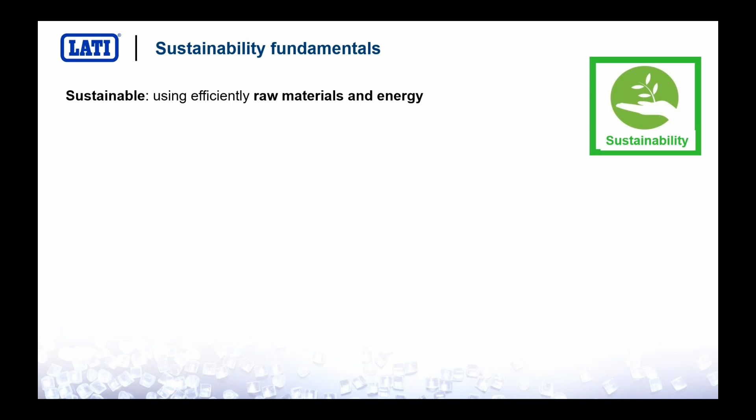So first of all, let's introduce some of the most important concepts of sustainability. First of all, we have to redefine what is sustainable. We know that is sustainable every process, material, or application that uses in an efficient way raw materials and energy. We have to keep this in our mind. So use efficiently raw materials and energy.

The second concept is the so-called life cycle assessment. What is the life cycle assessment? It's a quite complicated process allowing us to evaluate the impact on the environment of a process, an application, a product, or a service. This is a quite complicated evaluation.

The third concept is the so-called global warming potential. The global warming potential is expressed as kilogram of CO2 equivalent and is calculated and defined for every product, process, or service. All these topics are quite familiar here at LATI. We strongly believe in the track of sustainability, and that's the reason why we have just achieved the very important goal of the platinum medal EcoVadis for the highest ranking of sustainability.

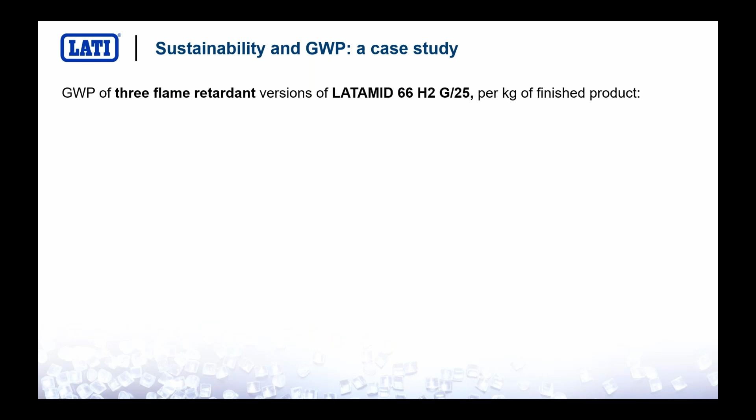Now let's give a look at LATI materials and global warming potential. Let's try to understand what is the impact on the planet, on our environment of three typical flame retardant compounds. We have taken three very popular grades made out of polyamide 6,6, 25% glass fiber, and flame retardant using brominated polystyrene, the so-called V0CT1, aluminium diphosphinate, the so-called V0HF1, and red phosphorus master batch, the so-called KBx.

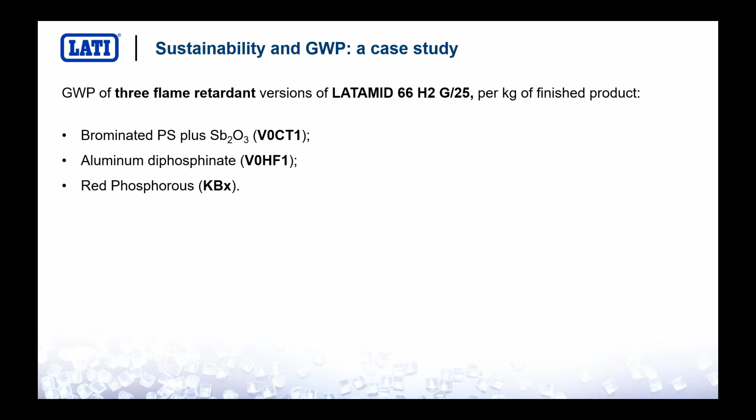The global warming potential for those plastics per kilogram of finished product is a number between 6 and 7 kilograms of CO2 equivalent per kilogram. Please note that these numbers are not obtained by using a very simple, straightforward online tool. We have a dedicated software, a dedicated database, and our calculations are extremely accurate. So these numbers are to be considered as extremely reliable.

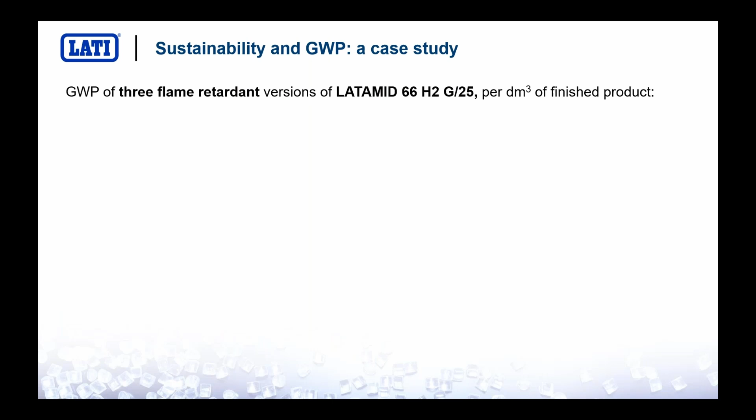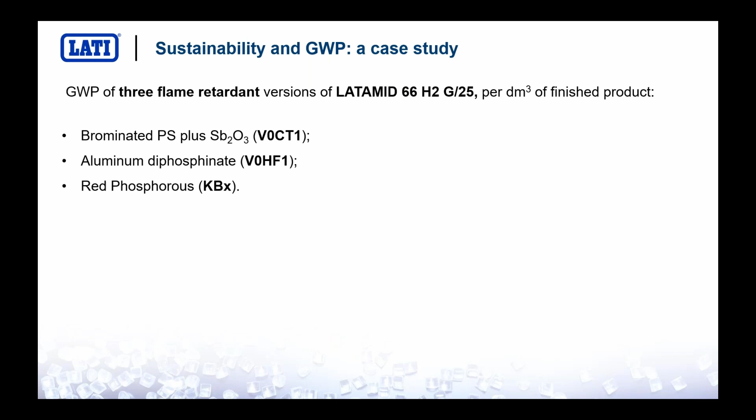If we move from this evaluation per kilogram of finished product to the evaluation per cubic decimeter or liter, so the volume of the application, then we will see that these numbers are skyrocketing because of the density of the material. So per every liter of the aforementioned flame retardant materials, the global warming potential is increased to 9 to 10 kilogram of CO2 equivalent per liter. So you see how impacting is every kilogram of flame retardant plastic that you put in your project.

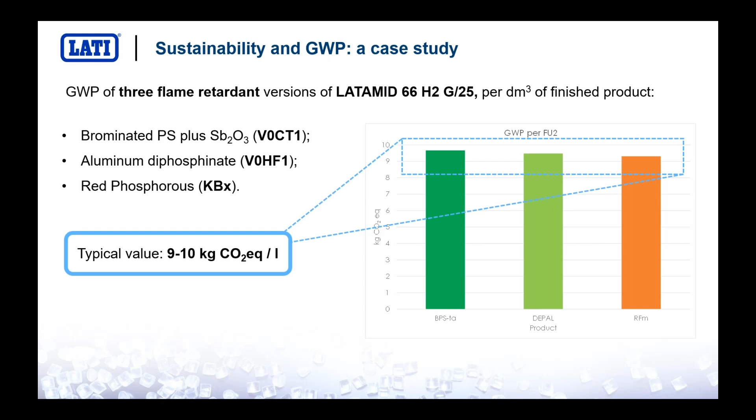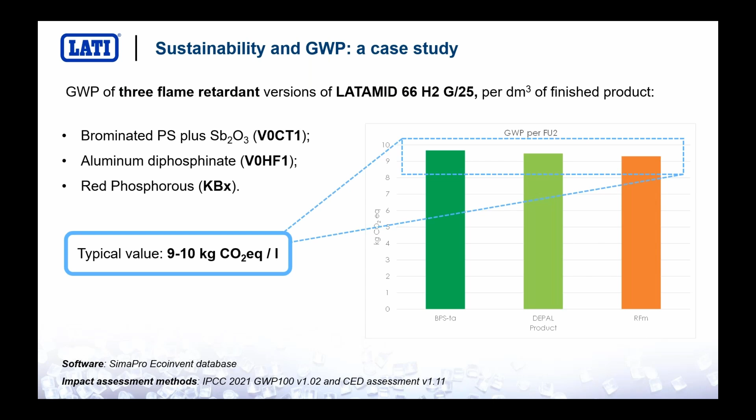Now, let's try to understand where does this global warming potential come from. Let's try to understand how to split the whole process of creating 1 kilogram of flame retardant plastic and try to understand where does this global warming potential come from. We have done this exercise with the university, and we have tried to keep track of everything happening from cradle, so from the very beginning, from the creation of raw materials, to gate, to our logistics gate. So we have studied the whole process from the raw materials to the finished product, to the finished LATI pellets.

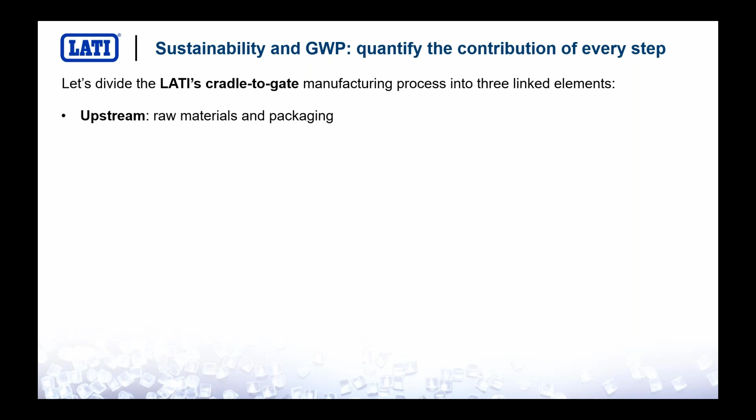We have divided the whole process into 3 streams: the upstream, including global warming potential related to raw materials and packaging of raw materials; the core process, that is our extrusion process; and then the downstream, which is the logistics, bringing our materials to the gate.

What we have found is that for a material like this one, a nylon 6 with 20% glass, halogen-free flame retardant, having a global warming potential of 7.9 kilogram of CO2 equivalent per liter, it is possible to evaluate the impact of every kg of this material on human health using a very specific system called Eco Point, whose definition is the environmental impact of every European citizen.

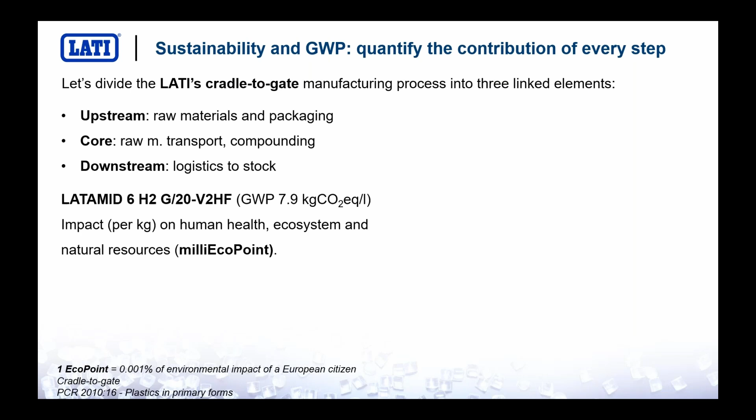It is possible to evaluate how every stream impacts on this global warming potential, and what is found is that the biggest portion of this impact is due to the upstream. So the biggest portion of the global warming potential of 1 kg of this material is related to the production of raw materials. The biggest issue is coming from the production of raw materials, not extrusion or transport. It is the production of plastic in itself that is harming the environment.

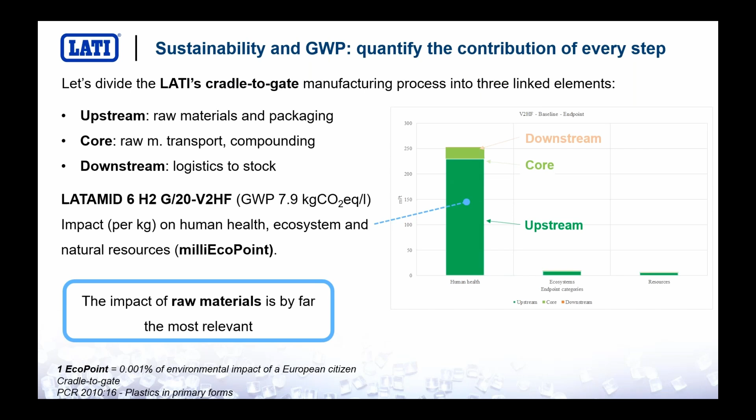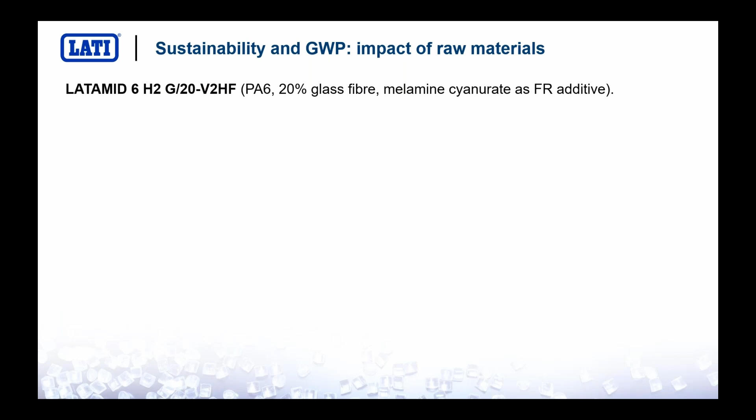Let's try to understand which raw material is actually impacting the most. We have done this exercise on this very material, and what we found is that the main components of the compound do not impact the same way. The biggest impact is due to the production of nylon 6. It's not the glass fibers, it's not the flame retardant system. The global warming potential is coming from the production of the plastic material. The nylon 6 in itself impacts for close to 85% of the total global warming potential.

This is a very important piece of information, because everybody may think that it's up to how you produce it, what kind of electric power you use. No way. It's the production of the plastic in itself that is actually creating the biggest chunk of the whole global warming potential.

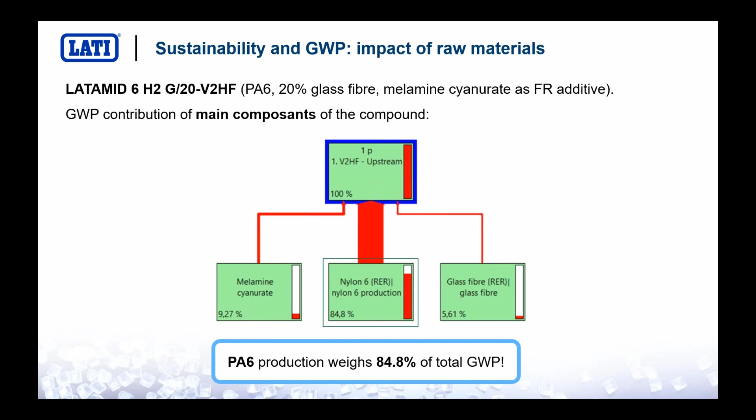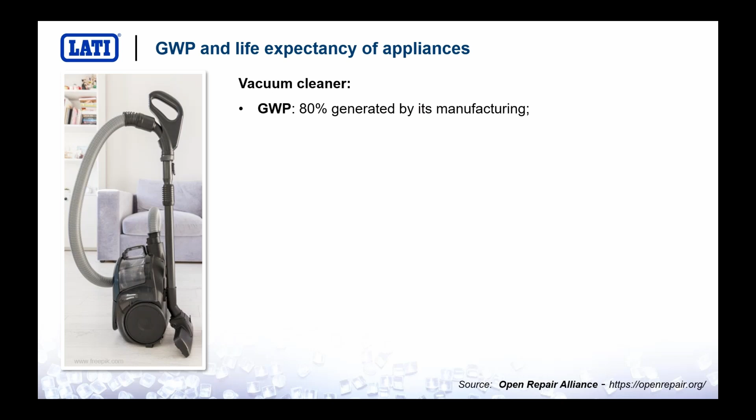So now let's introduce our partner here, the vacuum cleaner, and let's try to understand how global warming potential relates to an appliance like a vacuum cleaner. For a vacuum cleaner, what we know, and the source is Open Repair Alliance, is that 80% of the global warming potential generated by a vacuum cleaner during its whole life is happening during the production of the vacuum cleaner itself. By its manufacturing, assembling the parts, molding the plastics, creating the plastics, that part of the process is creating 80% of the whole global warming potential.

The second piece of information, which is very important, is the life expectancy of a vacuum cleaner. Vacuum cleaners are expected to last more or less 8 years. Some of them may last a little bit more, but that is the average life expectancy of a vacuum cleaner.

What happens when vacuum cleaners stop working? What is the most popular failure cause? The first failure cause is a broken electrical cord, 24%. Then we have failure in the electrical motor, 14.5%, failure in other electrical parts, 13%, and failure of the switch, 8%. All of you know what happens when the vacuum cleaner stops working.

We just dispose of it. Most of us do not even attempt to repair it. But if we wanted to try to repair it, we would find that 57% of the vacuum cleaners that have been submitted for repairing attempts have been actually repaired, and 18% more should be repairable if necessary information or tools were available. This means that 75% of the broken vacuum cleaners may be repaired.

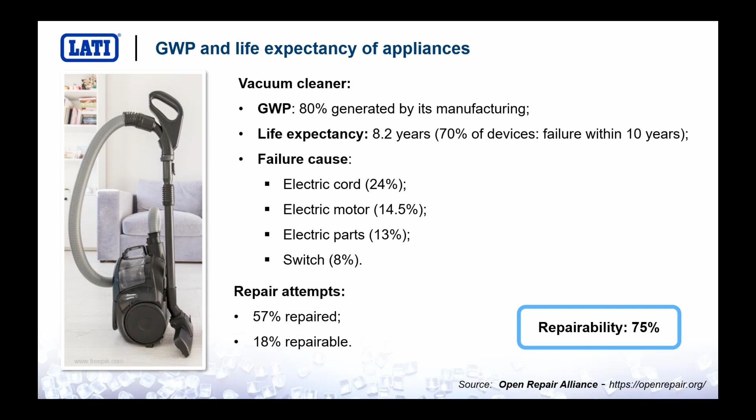What are the most popular issues that are a hindrance to repairability? The most common issue is not having the spare parts, 24.7%. The second one is related to the assembly, to the design of the device itself. It is impossible to open it, impossible to disassemble it. Some of the parts are not accessible, and this means it is not convenient to fix it. And then we have excessive wear of the material itself, wear or failure related to material degradation. These are the 3 most common, the most popular repairability issues, which are leading to the disposal of the vacuum cleaner.

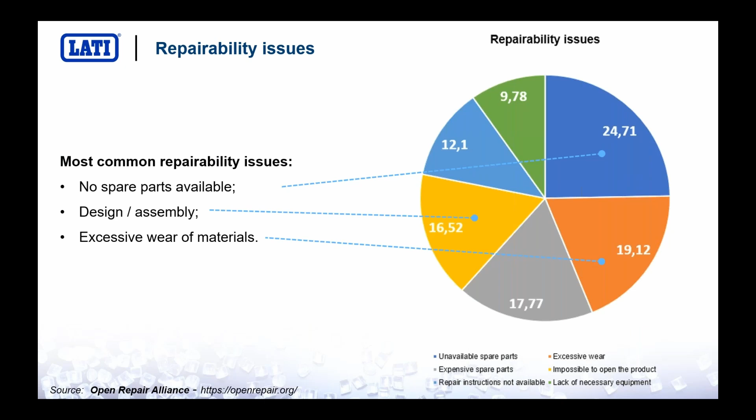Of course, the European Union has taken these kinds of issues into very careful evaluation, and we have new initiatives which have been created in the Green Deal. The most important one is the Ecodesign for Sustainable Products Regulation, ESPR.

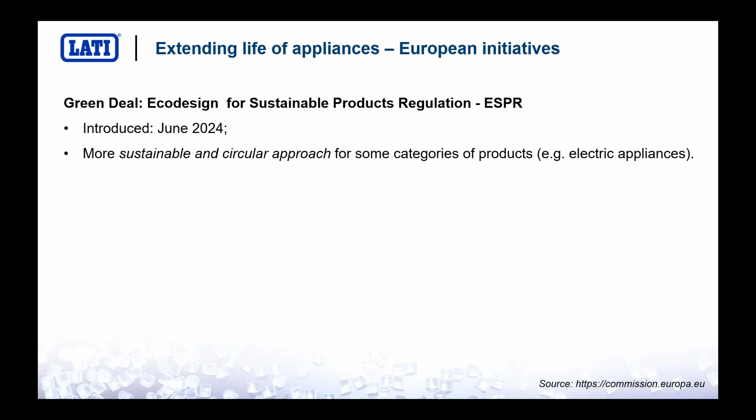What is this ESPR? It's a very large regulatory layout introduced in June 2024, whose aim is to create a new, more sustainable and circular approach for some categories of products, mostly electric appliances, but not only—there is also a part related to textiles and so on. Of course, I'm not saying this will be the law from tomorrow, but what we have to keep clear in mind is that we have to go in the direction of creating new products in a more sustainable way and in a circular economy.

One of the tools introduced in the ESPR is the so-called digital product passport. What is a digital product passport? It's a bunch of information, a bunch of data, which will be accessible by QR code when you go to the media store and want to buy a new vacuum cleaner. You will find a QR code, you scan it, and in a screenshot you will have plenty of information.

First of all, you will have data concerning the sustainability and circularity of that very product. This information will include how many recycled raw materials have been used to manufacture that piece of equipment, and information about durability and any possibility to have it repaired in conformity with the right to repair regulation.

And then you will also know if that application has been designed to be recycled. Design for recycling means that at the end of life, that piece of equipment will be easily disassembled and scraps divided into homogeneous waste to be recycled or sent to energy recovery.

Of course, this digital product passport will give us plenty of information about the sustainability and circularity of this equipment, but it will also provide the so-called sustainability score, which will be a scoring method having some impact on the price of the sold good.

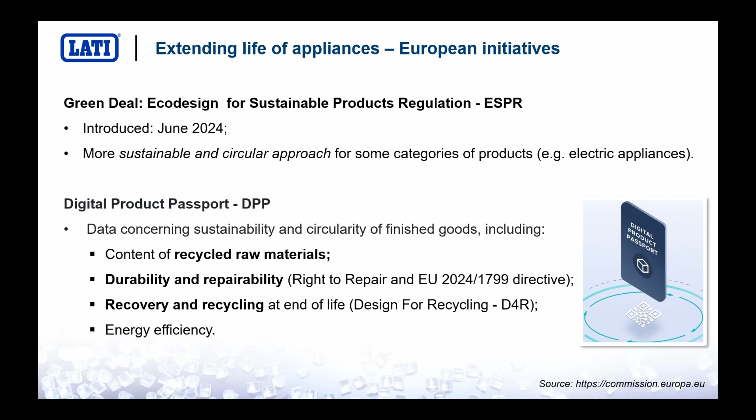Last but not least, of course, you will have indications about how efficiently this piece of equipment uses electric energy. So how will the appliance of the future be? How can we think about how to design an appliance for the future? Which kind of materials should we choose?

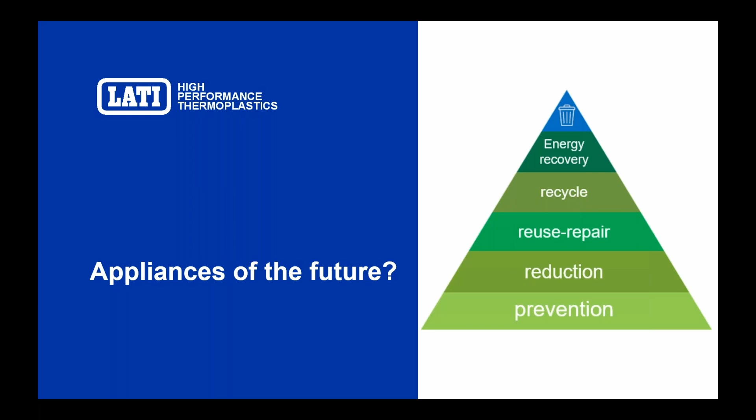So for the vacuum cleaner of the future, which are the most important steps we have to take into consideration? First of all, if we have to design a vacuum cleaner, we will need plenty of details, plenty of data. We need information about materials, global warming potential, life cycle assessment, and so on.

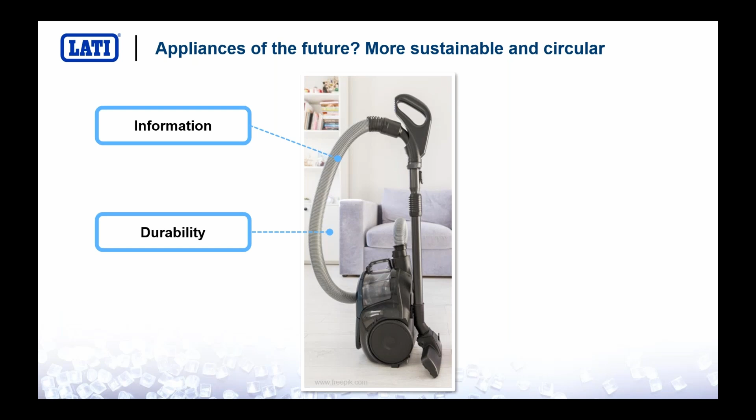We are already receiving plenty of requests from our customers concerning these very hot topics. Then we will have to provide indication about durability, which is also a very important step in the direction of extending the lifetime of the vacuum cleaner. We will have to use recycled raw materials and indicate what kind of raw materials have been used in our application.

We will have to design the application to be energy efficient. It will have to be as repairable as possible, because repairing means extending the life, and extending the life means reducing the global warming potential and the impact on the environment.

And then it will have to be designed for recycling. So at the end of its life, it must be possible to easily disassemble it, to divide scraps and materials in a very efficient way in order to recover and recycle them very easily.

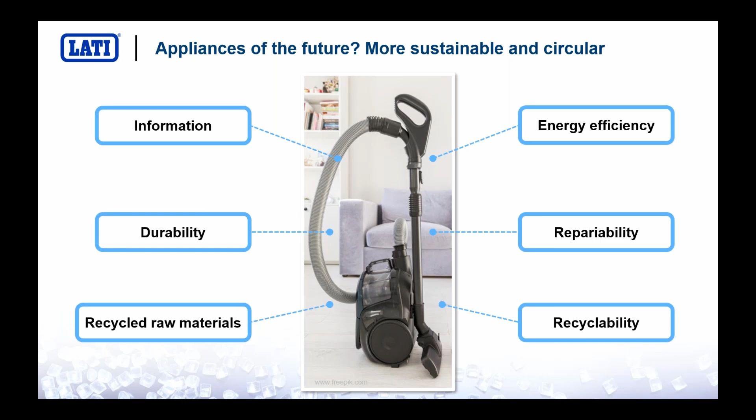Let's take a closer look at each one of these six steps, one by one.

Information. Information is very important. What kind of information are we asked for? Global warming potential and life cycle assessment. All this information must be available for LATI's customers. So if you are working in the appliance industry or automotive industry or whatever, and you ask LATI for indications about the global warming potential and life cycle assessment, at least global warming potential is something that we can already share with you very easily. We have created a dedicated team, fully dedicated to the sustainability issue, to the sustainability platform.

We have also purchased a software and a dedicated database. We collaborate with European universities because we want to have the most reliable answer for our customers. We are not using online tools to calculate the global warming potential. We are doing this job the right way, the most accurate way, using software and official databases. So do not hesitate to ask.

We are using these pieces of information to provide details to our customers and to help create a new range of eco-sustainable products, the so-called LATI Eco, which are produced using recycled raw materials, and LATIGEA products made using sustainable and bio-based polymers.

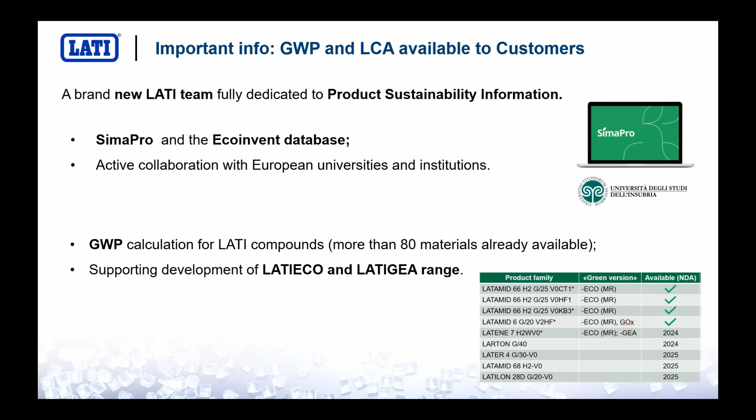LATI has also joined the Desiderata project, which is a European project funded by Horizon Europe. The goal of this project is to create injection-moldable compounds that are safe and sustainable by design.

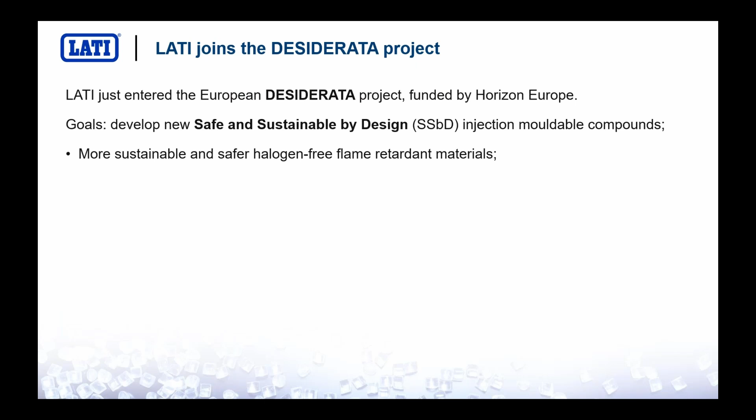Of course, we are working on developing new, more sustainable and halogen-free flame retardant materials. But what I personally find extremely interesting is that we will work on trying to simulate the effects of recycling on plastics. We will simulate the effects of multiple recycling processes through subsequent extrusions, and evaluate how the recycling process actually affects the quality of the compound itself.

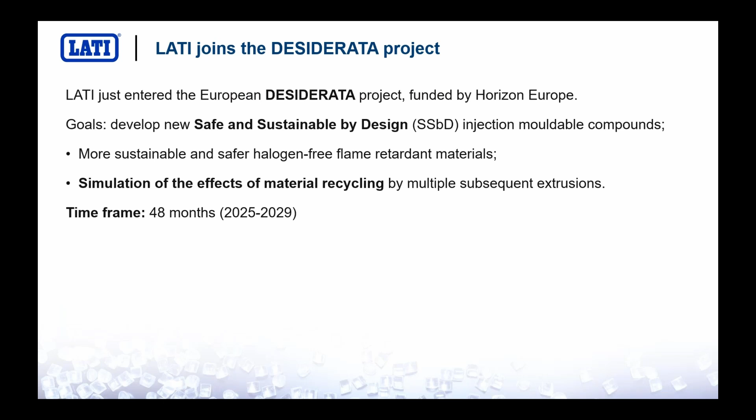Because as you know, each time you grind and extrude plastics again, you lose some of the properties, and we want to understand this better. We want to understand if it's possible to create some kind of stabilizers or similar solutions which help the material keep performing despite subsequent extrusions. We have four years to work on this, and we are already on track.

Durability. Durability is something extremely important, because as you have understood, our applications must last a little bit more, must last as long as possible, I would say. What is the most important piece of information that customers need when dealing with durability? So, how long will the part last?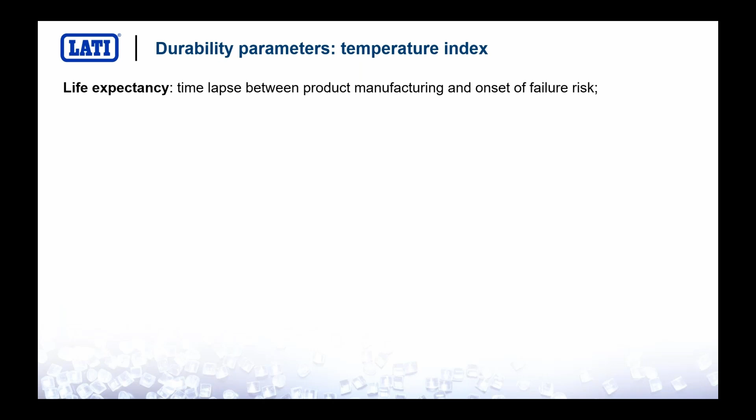The most important parameter is the so-called temperature index. Temperature index is used to evaluate the life expectancy of your application. The life expectancy is the time from when an application is created to when you have the onset of a potential failure.

Which is the factor that is actually making our materials age? Of course, temperature. Temperature is actually compromising the performance of plastics over time, and this is well known.

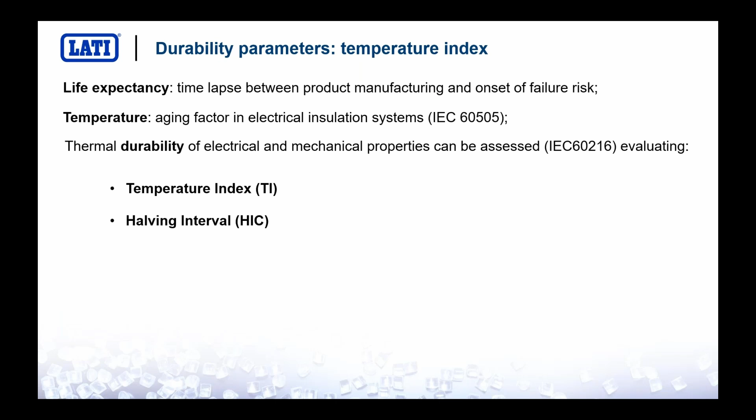So if you want to calculate how long your application will last during its lifetime, and you want to evaluate the temperature that your application can survive in continuous operation, you need the following pieces of information. You will need a temperature index, the so-called halving interval, the peak temperature, and then you have to provide an actual operating time, meaning the amount of time you would like your application to work.

With those four parameters, it is possible to evaluate the thermal endurance in continuous operation, which is defined as you see on the right, and then the consumed endurance potential, which is the amount of performance that will be consumed at the end of the lifetime of the application.

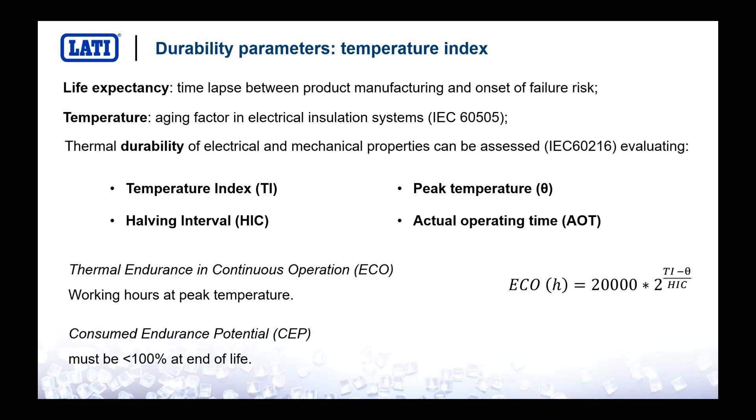With these slides, I'm trying to say that today it is possible to design applications to last the amount of time that we want, just by selecting the right material and using the right information.

Let's see an example. Let's suppose that we have to create a component working for 60,000 hours at 120 degrees. Let's suppose that we already have the temperature index that has been achieved by measuring the thermal decay of one of the properties, as an example, the dielectric strength.

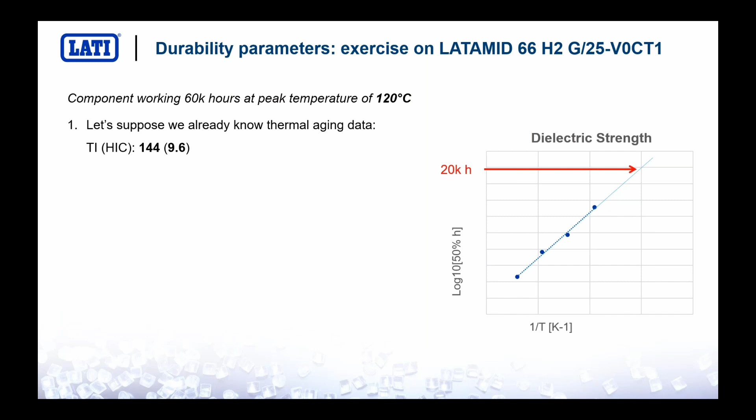Let's suppose we already know the thermal index at 20,000 hours. Let's suppose we also know the halving interval, which is the temperature difference between thermal index at 20,000 hours and thermal index at 10,000 hours. What we can evaluate is the amount of hours that this application can survive at that temperature.

Calculation says that this very material at 120 degrees will last more than 100,000 hours. Is this enough? Yes, because we wanted it to last 60,000 hours. So at the end of life, only 53% of its property potential will be actually depleted.

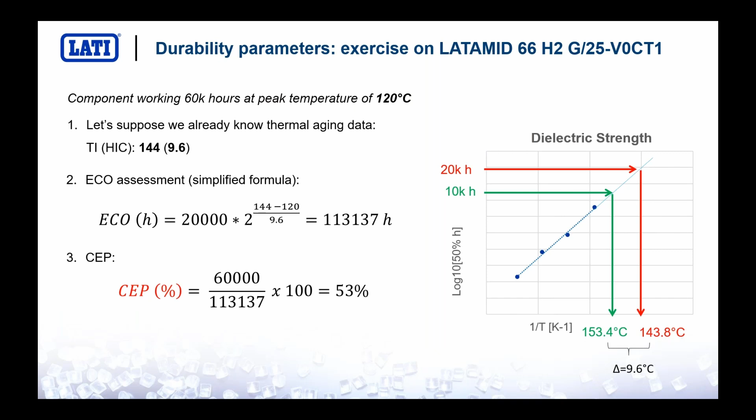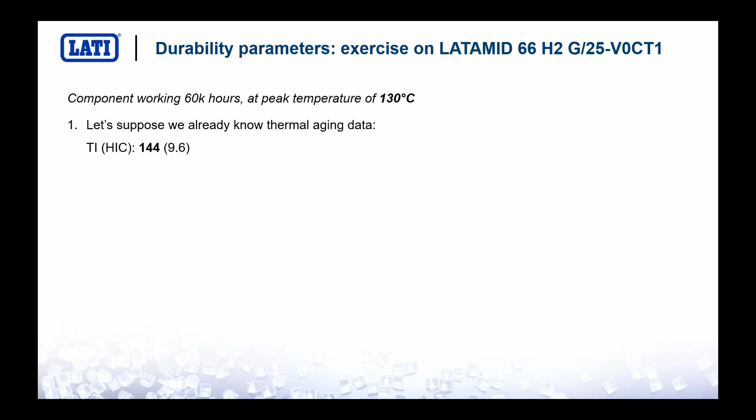On the contrary, let's suppose that we want to make the same exercise with 130 degrees C. What we evaluate is that with 130 degrees C, the amount of hours that the material can last is below 60,000 hours. So at the end of the 60,000 hours, this application is very keen to fail before the end of our time. And we are just talking about a difference of 10 degrees C.

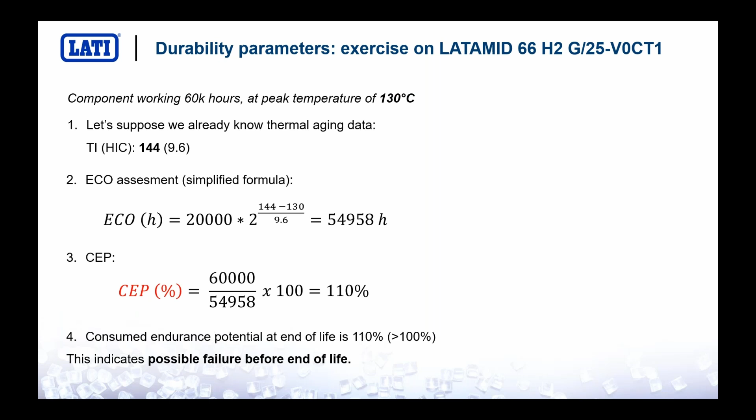So you understand how important it is to have thermal indexes carefully evaluated and provided to customers. Why is it so important to have thermal index or relative thermal index? Because nowadays what we are actually seeing is that we receive plenty of questions from customers concerning different temperatures or different life expectancy time. So we are asked for performance at 5,000 hours, 20,000 hours, 30, 40, 50,000 hours, but we are also asked for performance at different temperatures.

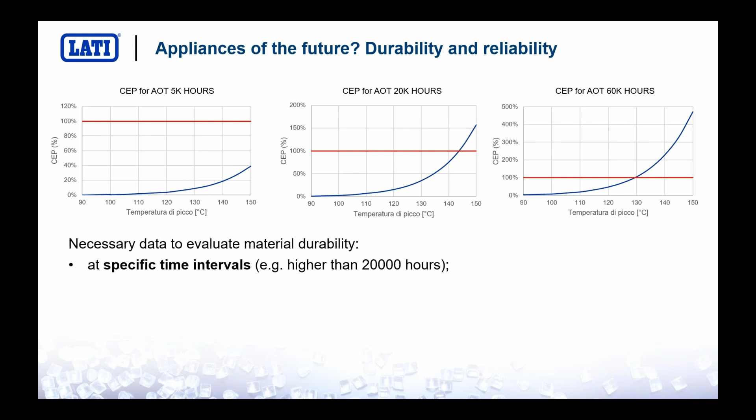For this very reason, it is very important that we as material producers provide all the necessary data obtained by aging of the material itself, so that you can make all your calculations concerning life expectancy of your application. So we are committed to provide the temperature index or the relative temperature index obtained by UL.

And we are also working, this is very important, to develop the ASTM E1877 method, which is a very fast method using thermogravimetry to evaluate the temperature index. It is not the same as the above, but at least it is very, very fast. You can have a temperature index just in a few hours, but this method is still under development. And we are trying to understand how reliable it is and try to introduce it into our praxis.

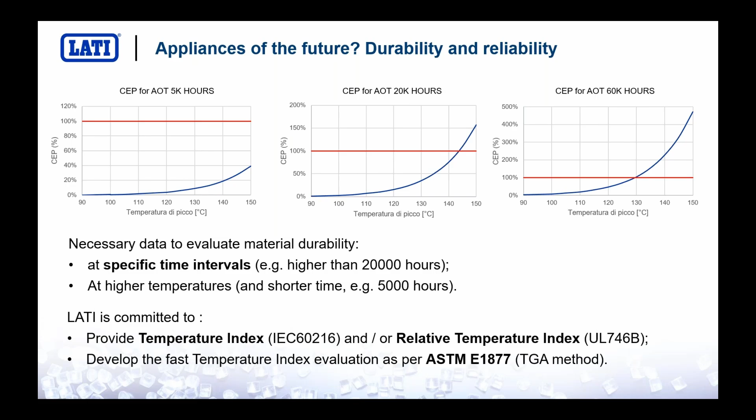Recycled raw materials, another very important piece of information. How much raw materials are we using in our application? It is very important to introduce recycled raw material because this will reduce, as I told you before, the global warming potential of your very application.

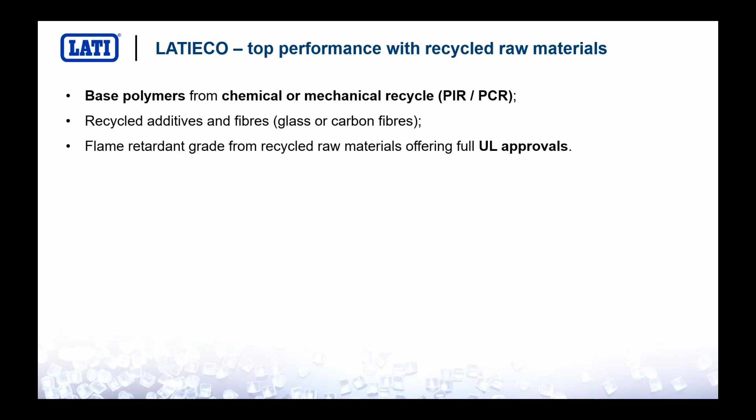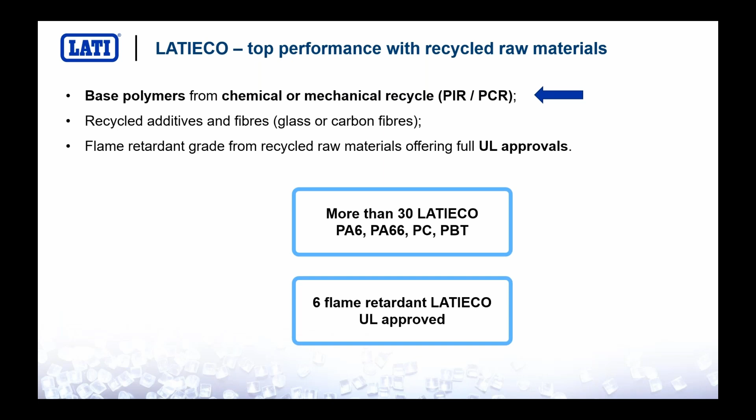LATI nowadays is working on introducing recycled, mechanically or chemically recycled, post-industrial or post-consumer polymers. We are working on the polymers. We are also working on additives like glass or carbon fibers, but our biggest efforts are on polymers. Once we have new flame retardant grades obtained by recycled polymers, we wanted them to be fully approved by the UL lab in order to have new, reliable, certified, approved flame retardant products. Nowadays, we have more than 30 LATIECO flame retardant and non-flame retardant products already available, and 6 are already UL approved.

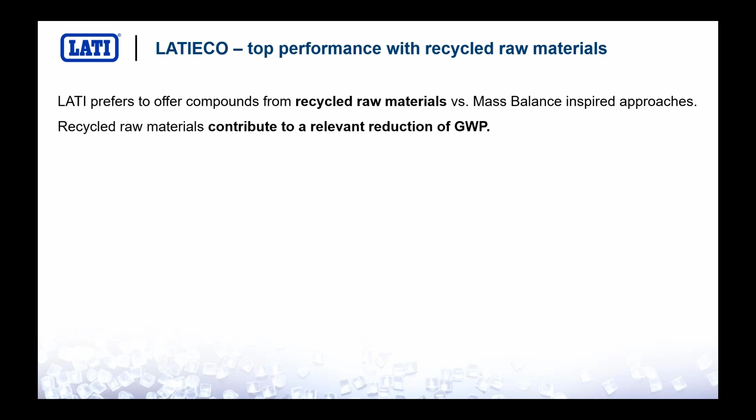Of course, it's very important to have not only recycled raw materials in new compounds, but to have them properly compounded and to be sure that they are actually performing the way we want them to. So we are working on recycled raw materials, recycled polymers. We do not like the mass balance approach. We think that it is very important to introduce really recycled polymers, but we also want to be sure that we are actually providing performing materials.

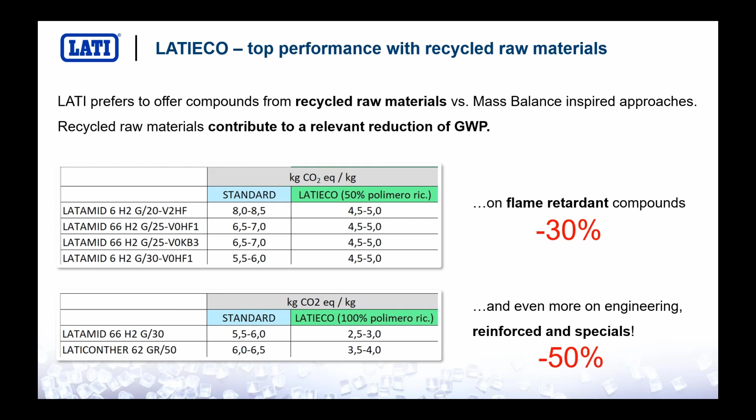If you just compare the global warming potential of a standard product and its LATIECO version, you will see that with flame retardants, you can actually reduce the global warming potential by 30%. And if you check the LATIECO version of the engineering products, like the glass fiber filled materials such as nylon 6 or nylon 6,6, this percentage can be increased up to 50%. So by introducing recycled polymers, you can reduce the global warming potential of a flame retardant compound by 30%, and the global warming potential of engineering compounds up to 50%. This gives you exactly an idea of how important it is to use really recycled polymers in new compounds.

We are actually producing them in our plants, and all of them are UL approved. During 2025, we will work on introducing two very important new LATIECO products: one for the 66G25 25% glass V0 halogen free, and the other for the nylon 6 V2 20% glass fiber. In 2025, we will start creating the LATIECO version of these two materials.

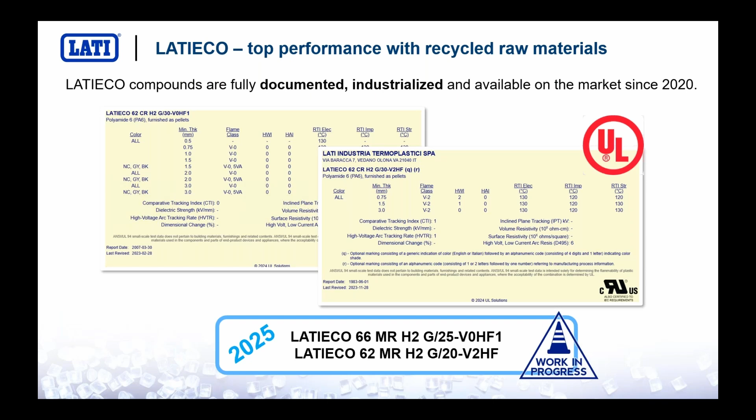As a case study to show you how good and efficient this process can be, let me share the case history of LATIECO 66 mechanically recycled 25% glass fiber V0 KB3, a phosphorus-based V0 nylon 66. This is the yellow card of the fossil-based product, Latamid 66G25 V0 KB3, and this is the official yellow card of the LATIECO version, which is the same product using mechanical recycled polyamide 66.

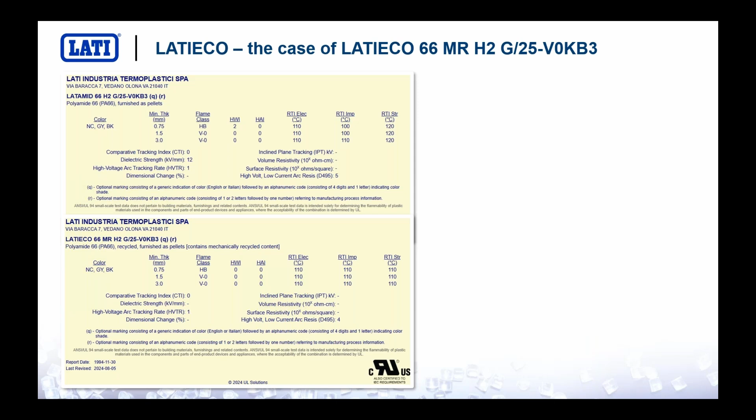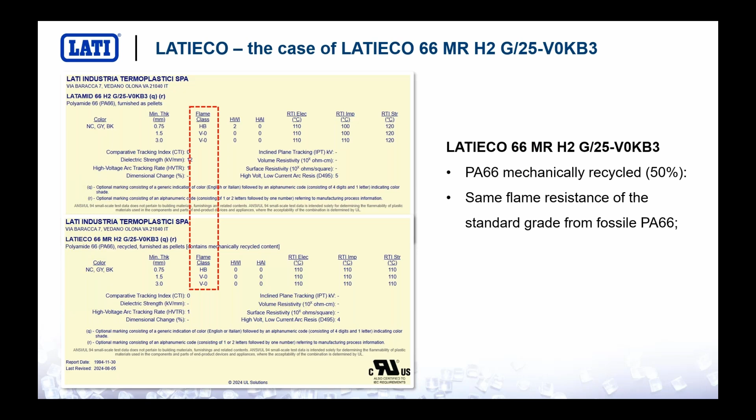As you can see, it is possible to achieve the same ratings on flammability, and it is also possible to achieve comparable RTIs. Is this enough?

No, it isn't. We also want to be sure that from a mechanical point of view the two materials perform the same, and here you can see how comparable they are. The Latamid, the fossil-based version, is a little more flexible and impact resistant, but the LATIECO is a little stiffer. Anyhow, the numbers are extremely close.

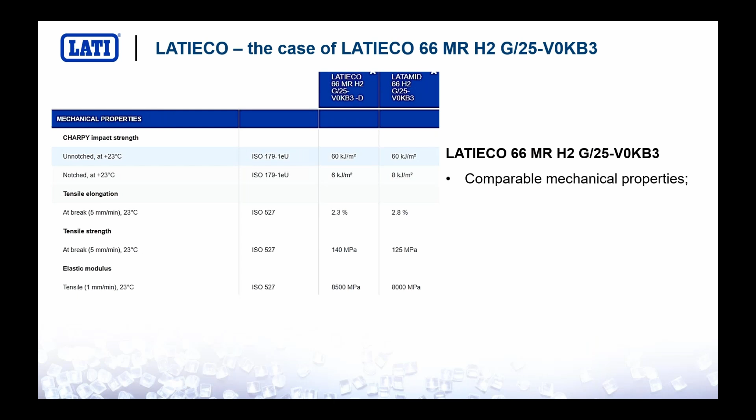So the LATIECO and the Latamid have very comparable mechanical properties, and they also share the same glow wire rating, both the glow wire ignition temperature and the glow wire flammability index.

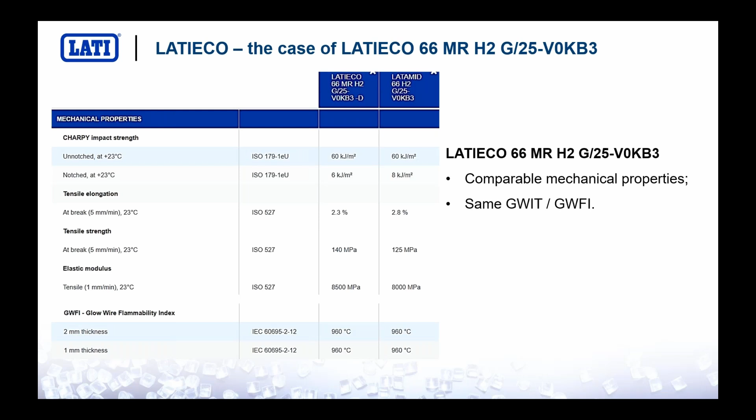So this is just to show you how possible it is to actually create sustainable versions of fossil-based materials using recycled polymers.

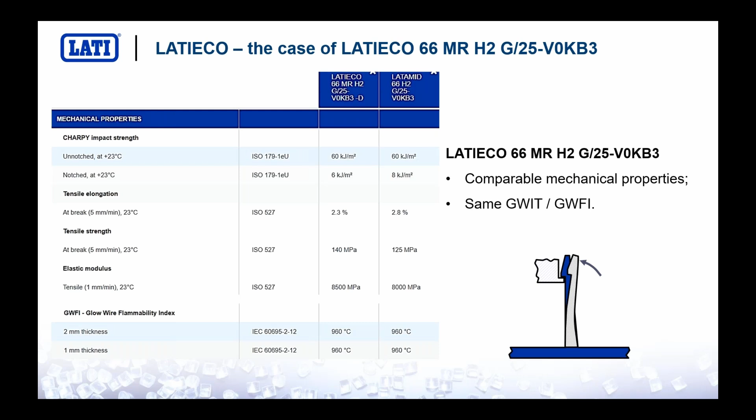Let's move into the last topic, repairability. What does repairability mean, and why is it so important? Repairability has been discussed for a long time. It's very important as it will create the so-called repair economy.

What is repair economy? Once all appliances are actually repairable, you can think about a new economy related to repairing itself: new jobs, new skills, new professionals, new shops where you can bring your appliance and fix it yourself, or have it fixed by a professional.

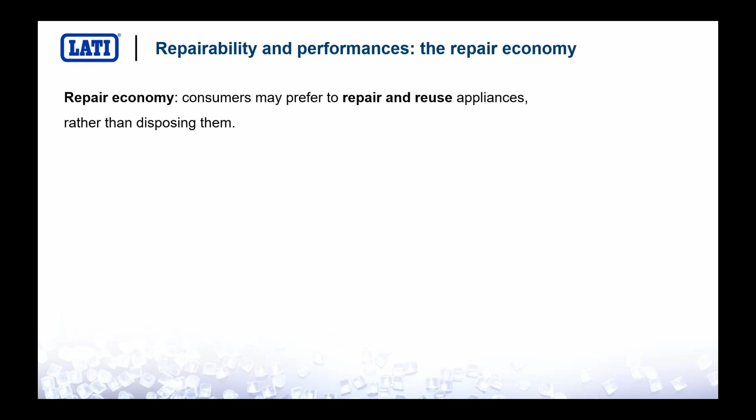People may want to keep their appliances and machines for longer because they want them repaired and reused rather than disposed of. This is extremely important, but how can this be done? What is the role of the material itself in this step?

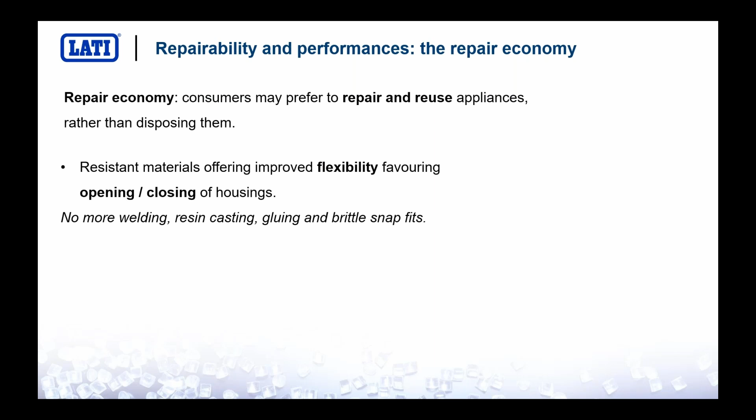Of course, at LATI we are focusing on providing materials which can be handled more times without breaking. So we are working on improving their flexibility and impact resistance in order to open and close housings and snap fits more and more times, and avoid processes like welding, resin casting, gluing, or the usage of snap fits that can only be closed, not opened.

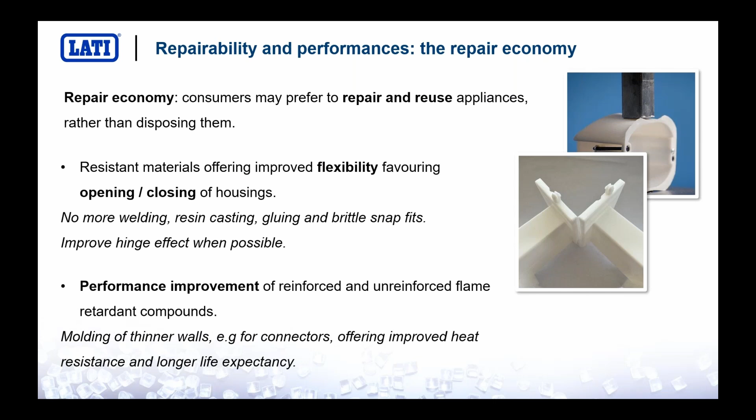We are also working on improving the hinge effect when possible. And then we have to work on improving overall performance, especially the flame retardancy of reinforced and unreinforced plastics, in order to have them really reliable, also when it comes to injection molding thinner walls like connectors or overmolding of electronic equipment.

How are we doing this? What kind of products are we revamping? What kind of products are we actually promoting, redesigning, and engineering?

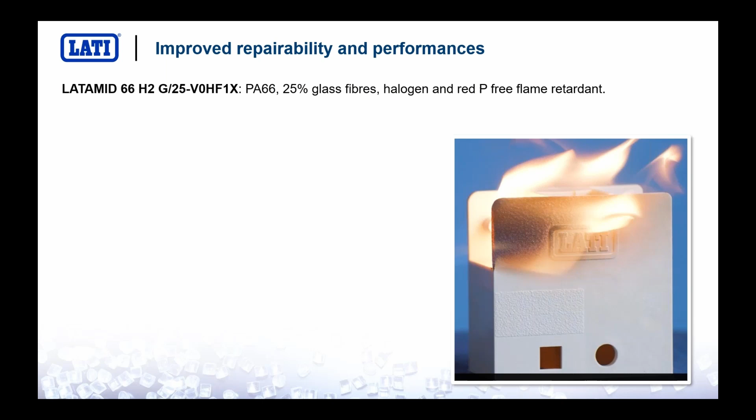First, let me talk about the 66 25% glass fiber filled V0 halogen free, an extremely well performing product with a very low environmental impact. We wanted it to be UL approved V0 at 0.4 millimeter so it could be used for injection molding of very thin walls. The new material is called V0 HF1X, fully approved down to 0.4 mm for UL94 V0.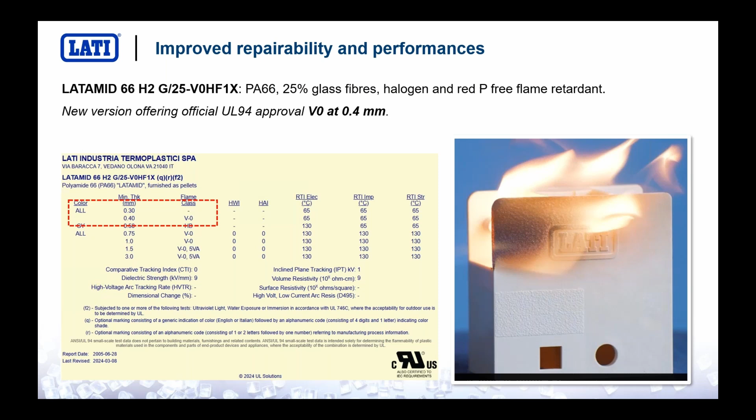This is the first effort we made in the direction of providing new flame retardants.

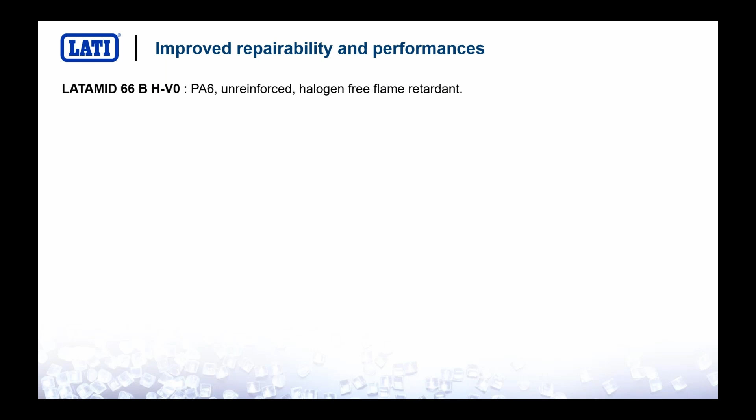Then we wanted to revamp an old, very fashionable product, which is a nylon 66 halogen-free, unreinforced, flame retardant. So we took this guy here and we wanted it to be polished and revamped, to be a little bit more performing and more appealing.

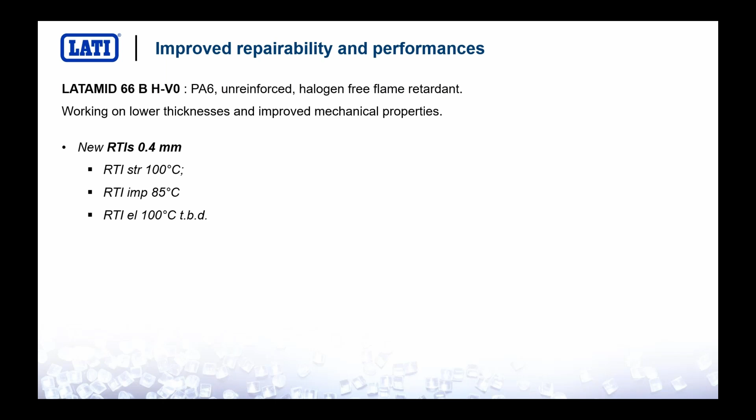We knew that the material in itself had very good mechanical properties, very good elongation at break. We wanted it to have also a new RTI, relative temperature index, down to 0.4. We already achieved the new mechanical RTIs, 85 and 100 degrees C, and we're going to be given also the electrical RTIs, which will be at least 100 degrees C. You do not see these new ratings on this material right now because this process will end at the beginning of 2025. But at least I want to share with you this very important decision: we want to refurbish, revamp, and boost unreinforced polyamide flame retardants for repairable applications and low thickness applications.

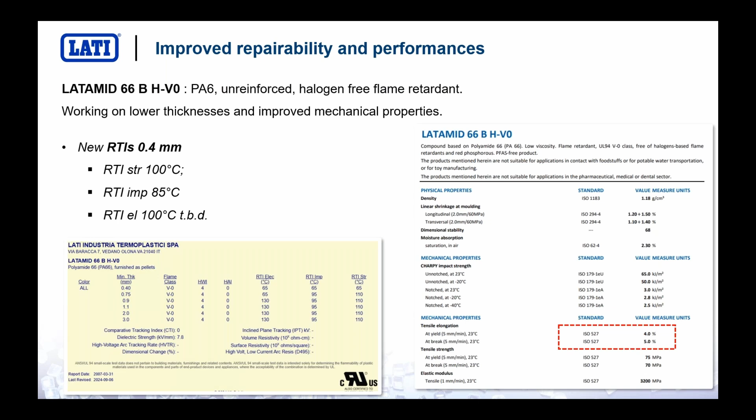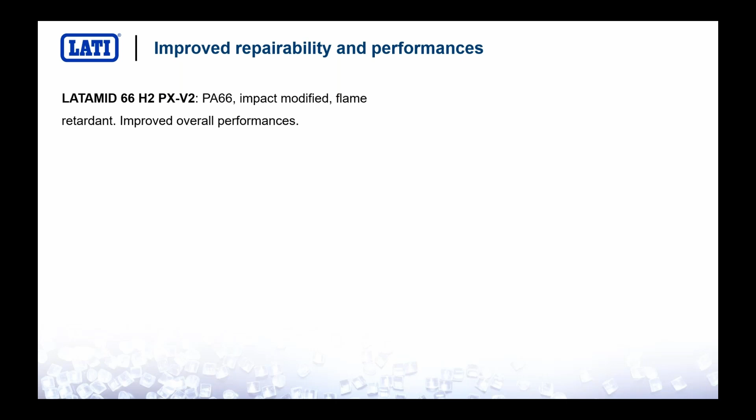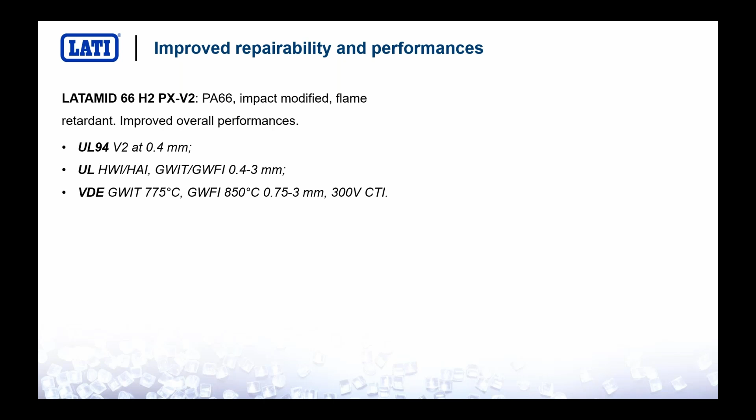On the same track, we see the efforts that we have performed on nylon 66 impact modified, meaning the PX V2 material. Very good product. We wanted to have a brand new rating down to 0.4 material, new glow wire, new applications, and new performance evaluated also at the VDE, glow wire ignition temperature and flammability index. You will see the updated yellow card and updated VDE certification at the beginning of 2025. I would like to focus your attention on the extremely good mechanical performance of this unreinforced and toughened polyamide 66.

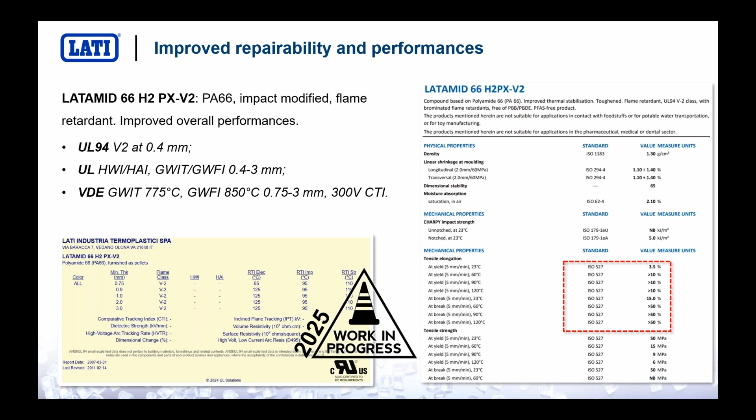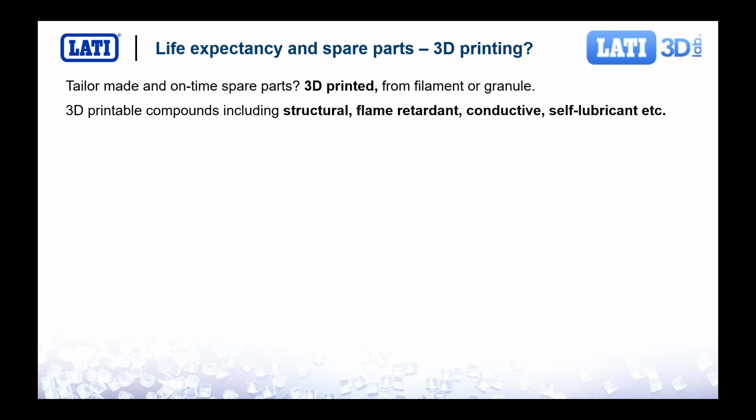Last but not least, I want to share with you some news concerning our 3D printable materials, coming from our LATI 3D Lab. LATI 3D Lab is dedicated to creating 3D printable filament or granule materials that can be used to produce parts. I'm not just talking about ABS or PLA, I'm talking about proper structural, flame retardant, conductive, self-lubricant, and detectable materials. Our 3D lab is capable of creating filament offering real performance from a structural point of view, flame retardancy, and so on.

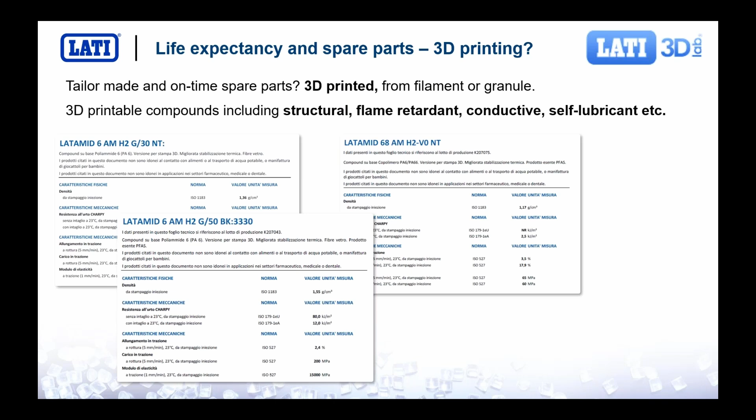Here you can see the two technical data sheets of a nylon 6 30% glass, nylon 6 50% glass for 3D printing, and then a copolymer 66/6 for connector manufacturing, which is also V0, and another special product, PPS for 3D printing with Kevlar inside. Nowadays, we can provide 3D printable filaments made out of PPS, PEEK, polysulfone, self-lubricant materials, flame retardant materials. We have more than 170 different 3D printable materials that can fit any kind of application and requirement.

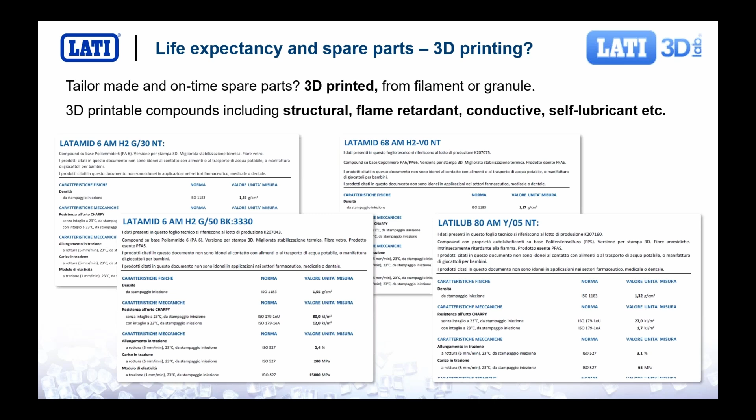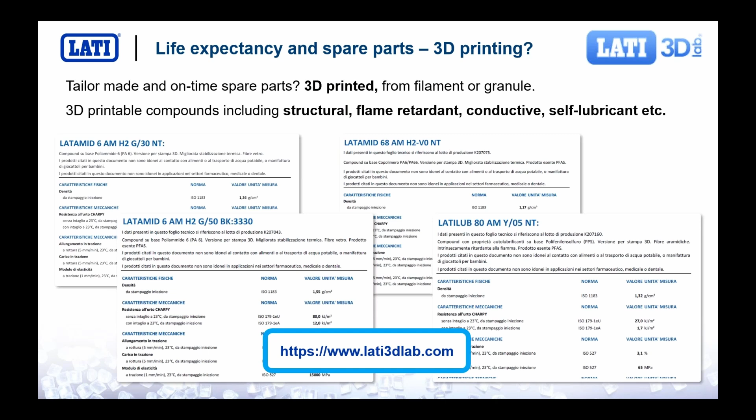It's really unbelievable the effort that LATI 3D Lab has done during these years. I strongly recommend you go and check the LATI 3D Lab website. You will find plenty of interesting materials and a very efficient technical service answering any kind of question that you may have.

Now, let's sum up what we have seen till now. First of all, we will have to rethink the future of applications and materials in a more circular way. We will have to think about durability, repairability, recovery, and recycling of our applications. It is really very important that we start today, not to be in trouble in 2 or 3 years.

First of all, what we have seen is that the biggest chunk of the global warming potential of any material is related not to the manufacturing process, but to the raw material in itself. And this can be much higher than the global warming potential generated by the usage of the application itself. This is the first very important input, saying that we have to save raw materials, we have to save the material in itself. We will have to do this because European laws are moving in that direction.

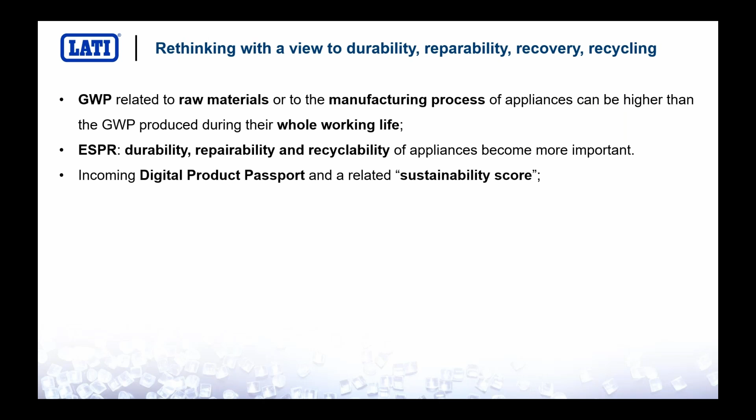So we have to work in the direction of durability, repairability, and recyclability. This information will be uploaded in the so-called digital product passport and the so-called sustainability score, which will be a QR code placed on your appliance when you go and buy it. So it will be a very important and discriminating parameter when it comes to purchasing a new application or appliance. We at LATI are committed to provide all necessary pieces of information concerning sustainability, so the global warming potential, LCA when possible, and all data concerning temperature index, which are used to evaluate the durability of the application.

We are also working on introducing new recycled raw materials like nylon 66, PBT, polycarbonate, and so on, in the new LATIECO product range.

Nowadays, we have more than 80 LATIECO compounds, which are the clones of the fossil-based materials, offering outstanding performance. You can find some of the datasheets on our website, not everything, but you could go and check it. We are working on improving the performance, mechanical and flame retardancy ratings of some strategic products, including especially the unreinforced plastics, in order to provide materials that can be used to design injection molded parts that can actually be repaired, opened, and handled in a much safer way.

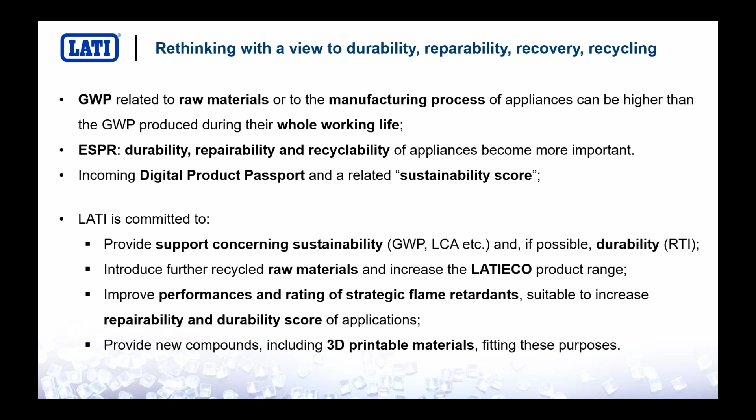I strongly encourage you to keep your eyes on the LATI website. I hope I was able to give you a decent introduction of what LATI is doing, in order to let you have the materials and the tools to design your applications for recycling, for more durable usage, and for repairability. I thank you, and I invite you to join the next webinar of LATI, which will focus on one year of work concerning PFAS replacement, PTFE replacement. It will be a very important webinar. We will give plenty of news concerning PTFE replacement. It will be on the 18th of December, and all of you will be welcome.